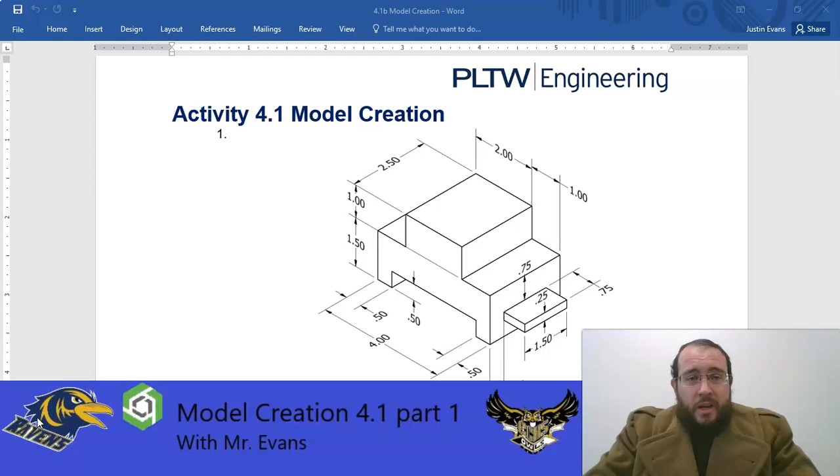Today you're going to make this part. It's going to be called 4.1b, and I've got maybe 3 or 4 parts under this that we're going to make. I haven't decided yet. But anyways, this is the first part that you're going to make.

If you look at it, I'm not teaching you anything new here, so I think you could probably make it on your own. What you have is a box that is 4 by 2.5, and you can extrude it 2.5 inches back, and then you can cut out a corner.

This is a 1 inch by 1 inch block, and then you have half an inch up, half an inch over, and you can get that - if this is half an inch and this is half an inch, then this is 3 inches wide.

Now you can do that in 1, 2, 3, 4 steps if you want, and that would be the subtractive method. Or you could do the additive method and just draw the shape out with your line tool and extrude it 2.5 inches forward. That's what I'm going to do.

So I'm going to jump over to Onshape and do that. I'm going to hit fast forward on that part because I know you can do it without me. So let's go to it.

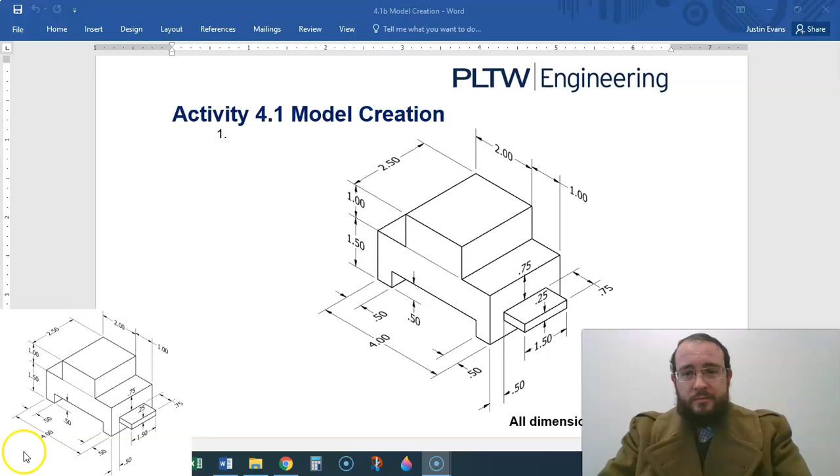Don't forget to include - I know it's a long name, sorry. Maybe we should cut it down. Let's get rid of the part that says model creation and just put 4.1b, part 1, class period, and initials. All right, time to fast forward.

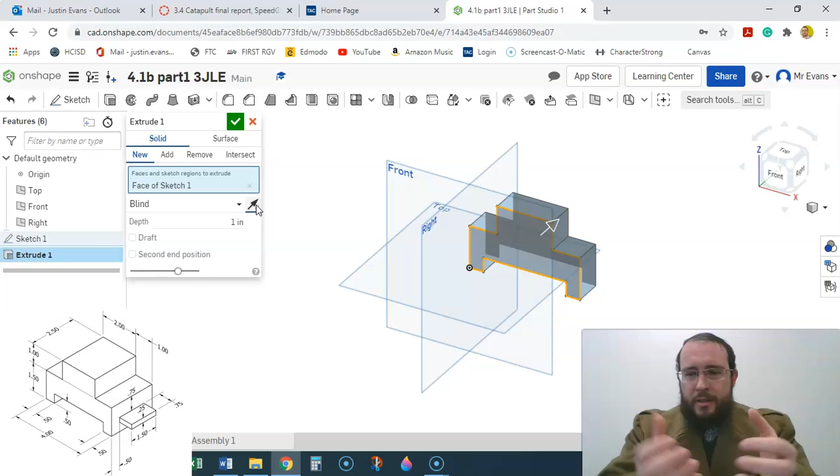All right, one thing I do want to show you here is there's an arrow that lets you decide which direction you want to extrude it. Now that's a bit of a problem - sometimes it goes and assumes the wrong direction. Maybe some of you have been running that glitch where you tell it to cut through something and it's cutting through the wrong direction. This will give you the control to do that.

You can even do it symmetrically, where it puts it in the middle. I'm going to do that this time just to put it symmetrically because it looks kind of cool, balanced. It doesn't matter if you do it that way, but thought I might share that with you today.

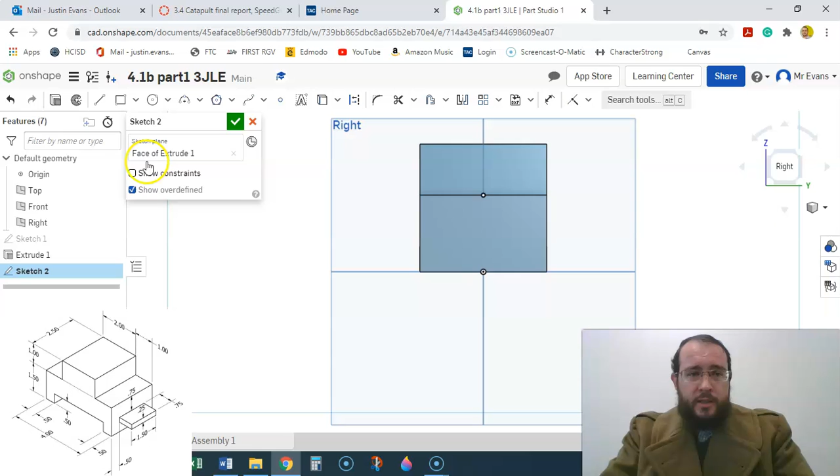Now let's create a sketch on this front surface here. This is going to take 5 dimensions, 4 of them inside of the sketch, and that is because this little shelf here has 2 dimensions for sizing and 2 dimensions for location. The sizing of this thing is 1.5 by 1/4, and I need to put a dimension on where it is located.

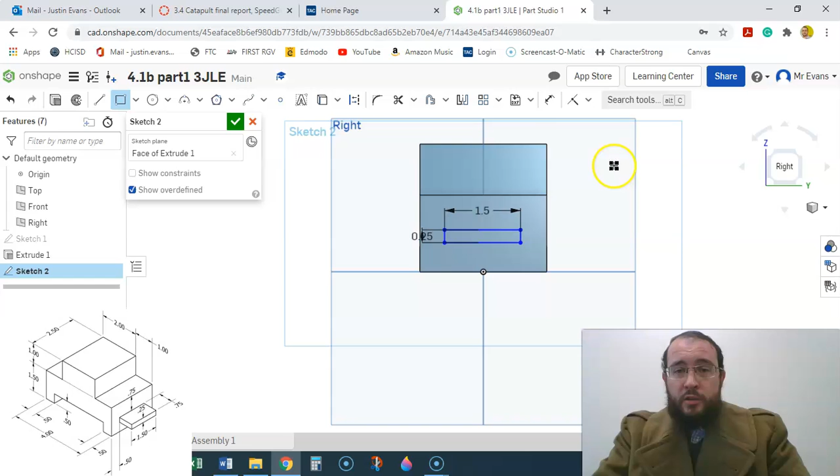And its location, according to the thing, is 0.75 down. And it is, if you look at the dimensions, half an inch over, 0.5. And I believe that centers it.

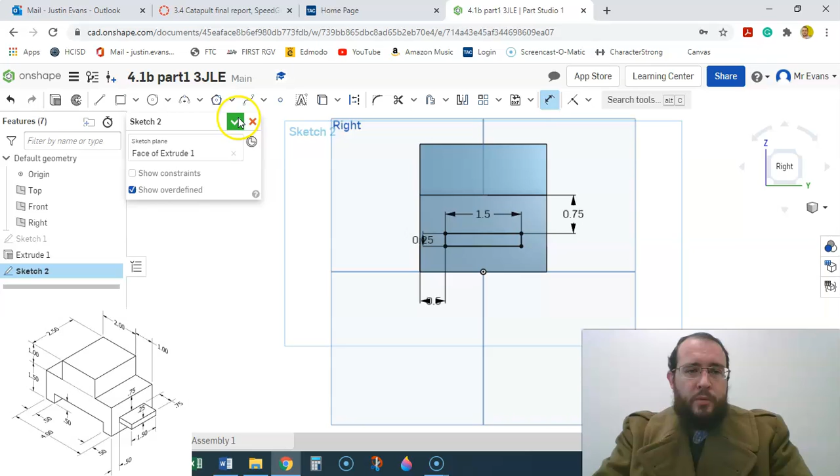And then the last dimension is how far to extrude it. So we have 2 location dimensions, and then in 2D we have 2 size dimensions, and now we have the extrusion dimension - how far out it comes out. That is supposed to be 0.75.

All right, that's it. Send me a view of the part with the 2 extrusions showing here, unless you tried to do all the other cuts, then that's fine. But make sure that the part tree is shown. You're not going to get low points because you had more extrusions - that doesn't matter to me. And then make sure that the title is shown.

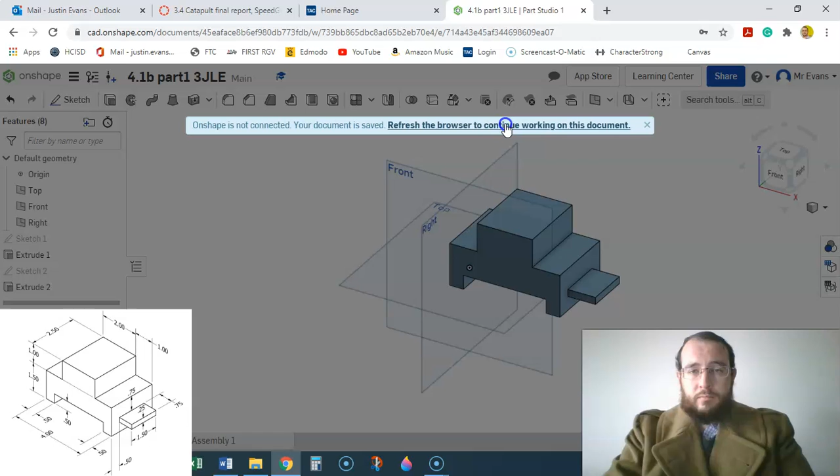Well, I think I'll leave that in the video. That was kind of weird that it popped up with that. I must have had an internet connectivity issue.